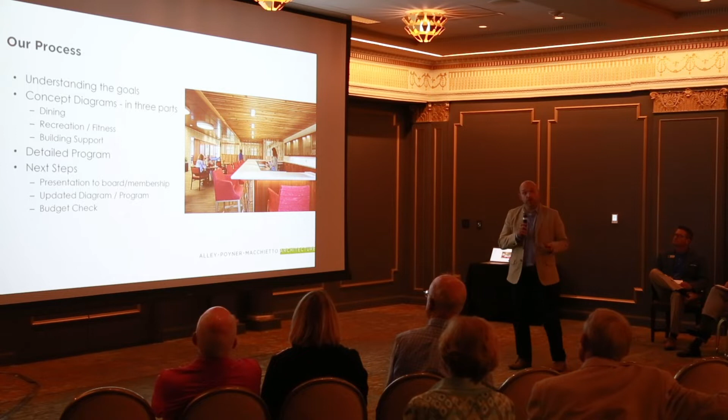So we picked up at a point where the board was considering how to program the replacement of the building and what items to include within that, and start to lay out a design, do some pricing, and pull together a bid package for that.

There's really multiple phases. This is going to focus on the new pool house building, or the replacement of the current pool house building. We'll touch on some other amenities around, and we'll also highlight in the schedule when this renovation occurred, because you'll notice there's fairly serious consideration of the pool house building, then there was kind of a pause in the overall schedule.

And that's because we shifted focus onto the planning for this space, the construction documents. Once construction started on this, then design picked up again concurrently with construction to where we finished.

At a high level, I want to show some of the process. We talked a lot about programming, so early on we went through a list of what spaces are needed, an evaluation of the existing facility, and worked through with the board and staff at the time on what sort of amenities to include. That's the programming, as well as perhaps some conversations about what presentations will be made and what timing.

These are two sketches that were starting points. The one on the left was from a previous consultant who helped the club do some master planning before we were hired, to talk through what could occur in this replacement building for the pool house.

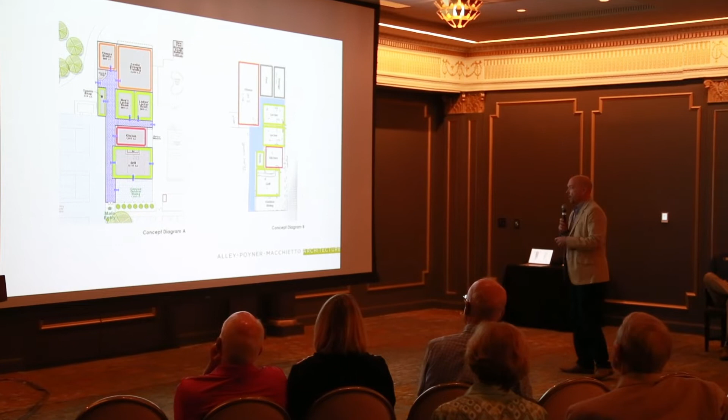The sketch on the right is a variation. We call it concept diagram B for this, but it was a modification of that to look at the early programmatic elements.

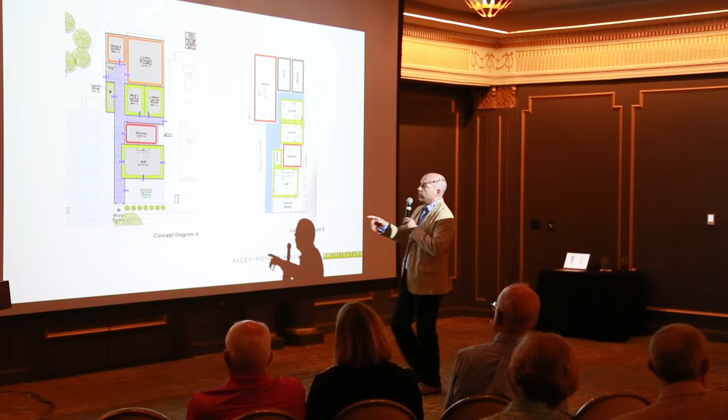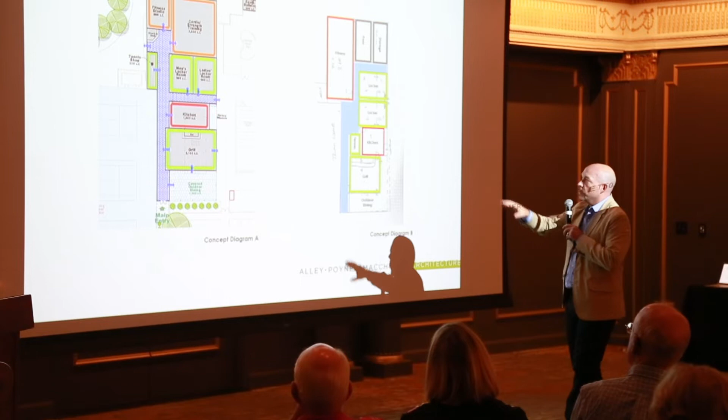The reason I show this is, if you notice, the outside consultant had suggested the replacement building include a kitchen, a grill, which is indoor seating, men's and women's locker rooms, which the current building has, cardio and strength training, which does not currently, as you know, is not included in that building, fitness studio, which that language means a multi-purpose room, could be spinning one day, could be yoga another, a tennis shop moved over as well, and then some outdoor dining, and that was the starting point when we were engaged.

To the right's the first version of that. We started almost immediately at that time working with the board through how does this actually fit on this site. If you've all been through a planning process, you know the early diagrams don't always accommodate all of the things that are not yet known.

In this case, we began almost immediately looking at the size of the kitchen. Kitchens can be sized by a number of factors. We do a lot of hospitality work, including restaurants, so we size them based on the equipment, which is based on the number of either pool visitors you want to serve food to, the number of dishes you want to move through it at what time, and then obviously what the chef wants to prepare.

So we started doing some benchmarking. We also early on did some visualization with the board - what do you want the outdoor dining to look like? Obviously, when you start any process like this, everyone thinks about what you have, unless it's a new build with no precedent. So you have to go through this process of, this is what you have, it's a remnant, what do you want it to be in the future?

We use a lot of examples of case studies where we go through other projects we've designed, to say this is the size of the dining area it serves, this is what we worked through with that restaurant owner or chef on the menu, and this is the equivalent size of the kitchen. This is just one in Dundee that we use as a precedent.

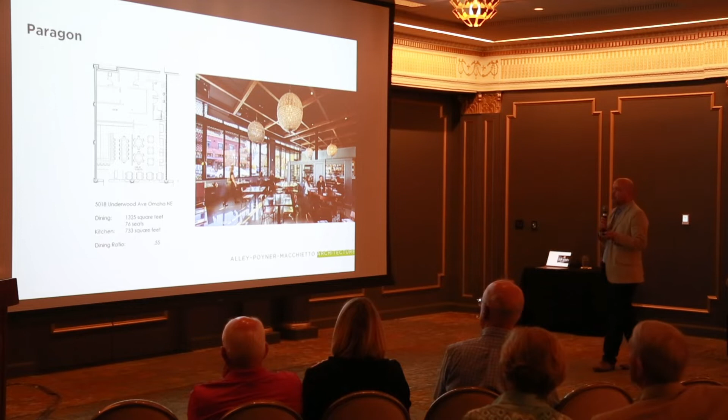We went through some examples of what current workout facilities provide, some we designed, some we didn't, and the amenities within that. We talked about programmatically what the training simulator could look like.

How many bodies do you want to have in the studio space? What's the extent of the possible uses? Personalized training, do you want the capacity to do spinning? Spinning involves bike storage. What's that mean?

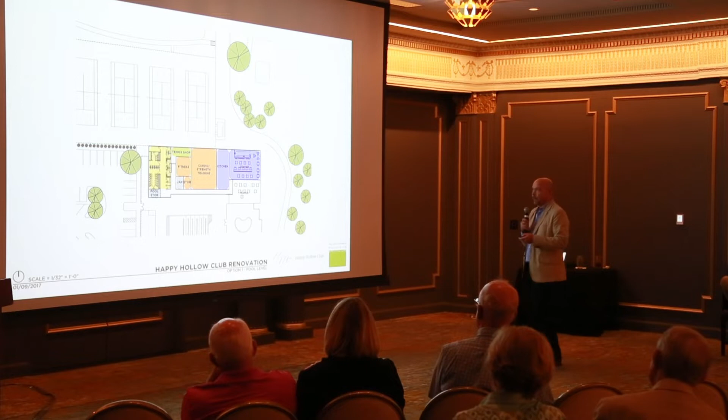Basic early questions, and that comes up with an early program, and we started with that on this project as well. Once we did those early meetings, we started to dig into how it's laid out on the site. This is the first time tonight I'm showing a site plan. You'll see in this case the tennis courts are existing in this drawing, and the pool is existing below.

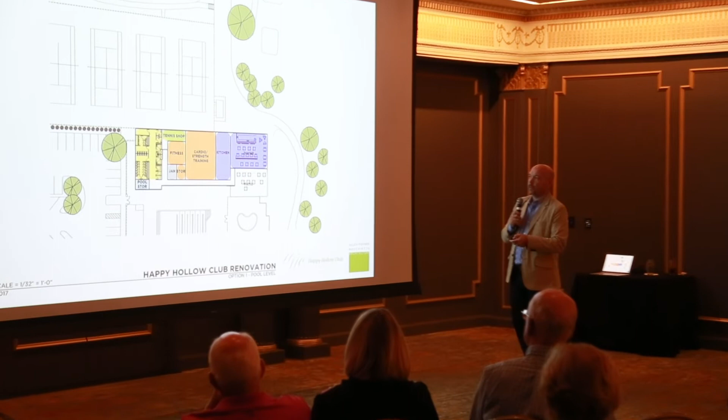Our early goal was to stay within that space that the current pool house sits and the covered picnic area just to the east covers. The story of this site is you're going to quickly see there are constraints to everything fitting on this site, and we've kind of been battling those constraints throughout.

So later versions you'll see the first modification. One of the early changes when we did analysis on the kitchens was the kitchen got bigger, considerably bigger, based on the early diagrams, based on the number of meals served and what we wanted to do within that.

You'll also start to see right sizing of the restrooms. Early on there was one set of restrooms, and if you've been through the restrooms over there now, you know they need to be durable because it's a lot of wet feet, a lot of wet towels. So you start to think about, in any aquatics environment, how durable those need to be.

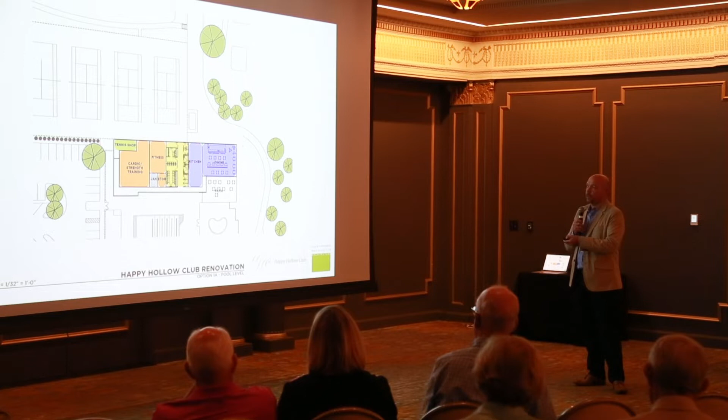At the time we were servicing tennis out of this, and there's no specialized restrooms for tennis, so tennis players would be using the same thing as the wet users of the pool, and also those dining would use the same restrooms. That quickly became a concept of, is that what we want, or do we want to segregate those? In later versions, they eventually floated apart.

We looked at some denser options, different ways to configure it with an upper level. When you start introducing a second level, you start to get two stairs, you start to get an elevator, and that obviously adds some cost and complexity.

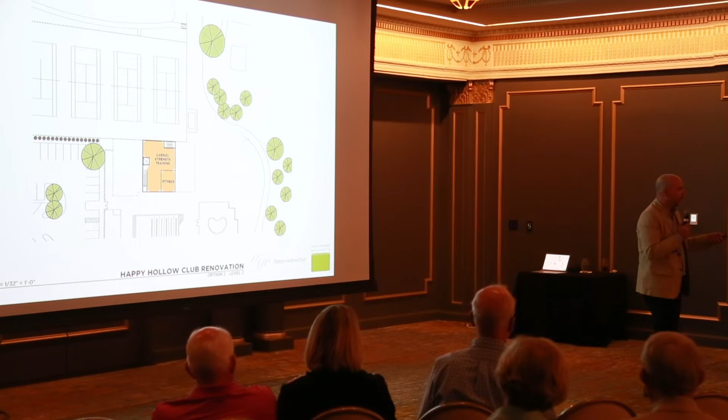So we looked at what could we do to expand the site. We were early on experimenting with diagrams of what this could be. We started to play around with - in this version you'll see the upper is not, it's actually a lower level, we're just showing it in this version of the board of where it could be on the site. We started to experiment with a single entry.

We start to segregate, for the first time, bathrooms for tennis and fitness that are different than the aquatic ones. The aquatic ones are only used when the pool is open, but the fitness center was going to be used year-round. So we started to see the split - bathrooms carved out just for dining, and you start to see the outdoor patio.

One thing that stayed true throughout this is early on we thought, based on our experience on the site, the preferred location for outdoor dining was on the east side. The views of the course are better, you get away from the parking lot, you have views down over the course, and it would be a nice evening as the sun hides behind the building. That remained consistent.

But the building starts to really grow to accommodate all the program things we identified early on. We start to put it on the site, and we're starting to play with the geometry of the building and the idea of a snack bar, how we service the pool. So again, these are just iterations.

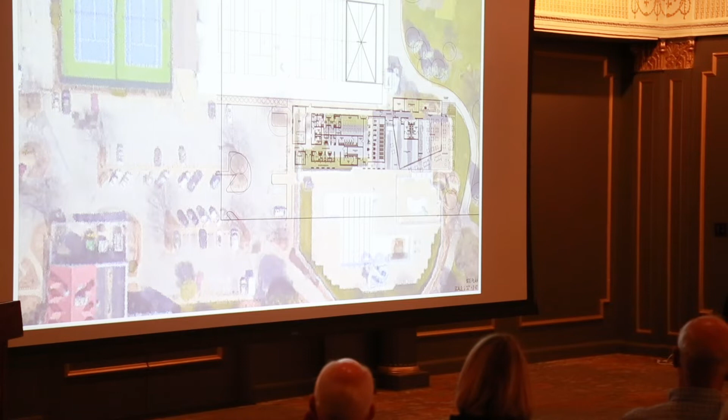You're going to see multiple iterations of the concept, multiple iterations of the building, but each one there's subtle tweaks. At any point, any aspect of this I can dig back into, but I'm kind of skipping through meetings and months.

You'll notice a few programmatic elements—we're just holding a placeholder on a lot of these. The existing pool building that's out there now also houses a small shop area with tools to cut wood, a cart storage area, and all the deck furniture gets stored there during the winter, so there's a large storage area. It's also where equipment for a number of Happy Hollow kids events gets stored, plus there's laundry.

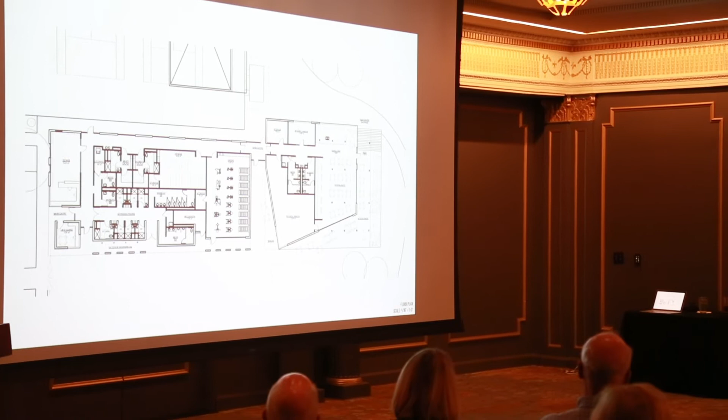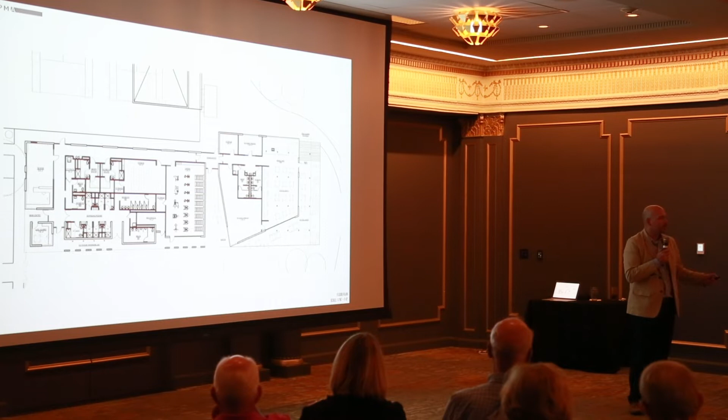So some of those programmatic elements, along with the key one we identified early on—if you're going to serve this number of outdoor dining areas, the pool, and peak events, we need more storage for the restaurant compared to contemporary standards—we wanted to prevent some of the shifting of materials from the main building over to the pool building. So you'll start to see a much larger group of storage spaces within this.

Again, we go back to case studies. Since it's a new concept, we were showing examples of how each of these compare to other restaurants, just to get an idea that we're not overbuilding any part of the kitchen, or whether the restaurant space needs more storage space. So again, benchmarking—you'll see each one we went through: this is 74 seats, 108 seats, 76 seats, just to give us some guidance along the way.

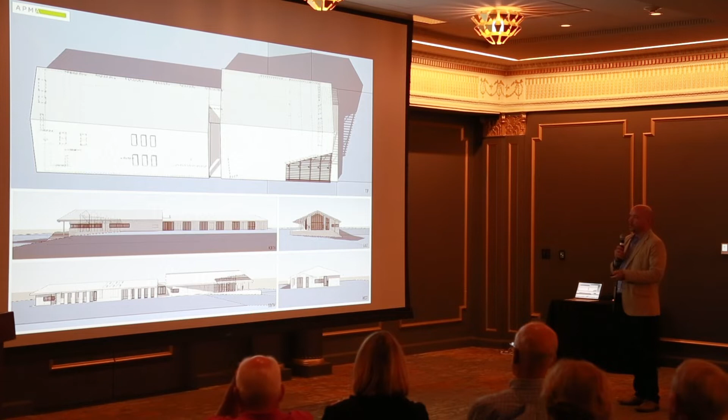And then we started to block out the building. These are some early versions—the final versions end up looking nothing like this, but you'll see for the first time as designers we're starting to make massing out of the diagrams to get a sense of what the building could look like. I think the part that remains is we still like dining on the east, facing that side, and that part's remained true.

And this is where we sort of moved to, with this building growing in size, now 14,000. What would happen if we kept golf and tennis in this footprint? You lose the advantage of having tennis in proximity to the restrooms, and you lose some other things we really liked in some of the schemes, but we thought it was worth exploring.

And we also started to get help from staff to understand what it's like to shovel snow off this tennis dome up against the building—some of the key operational things we were learning about too.

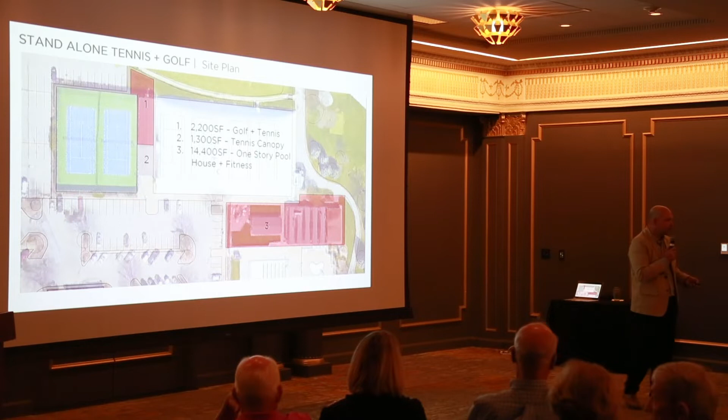One key thing we identified early on is if you're going to make this sort of investment in this zone for fitness and tennis, which are year-round activities, especially if the dining occurs year-round—when the pool is empty and perhaps has ice, snow, and leaves in it, and when the dome is up, what's the experience between those two? How do you make a facility that looks onto a dome covered in ice or an empty pool meet the standards of the club, when most of the venues on this campus have really great views and take advantage of the site? That also became a concern for the designers and the team.

This variation was a true 2-story, and what could we get out of this for 2 stories if we held it back—we can get up to 25,000. Again, variations on layouts. We shifted then to thinking about if we go with the longer items, where does the program land now? These are just diagrams that walked us through that.

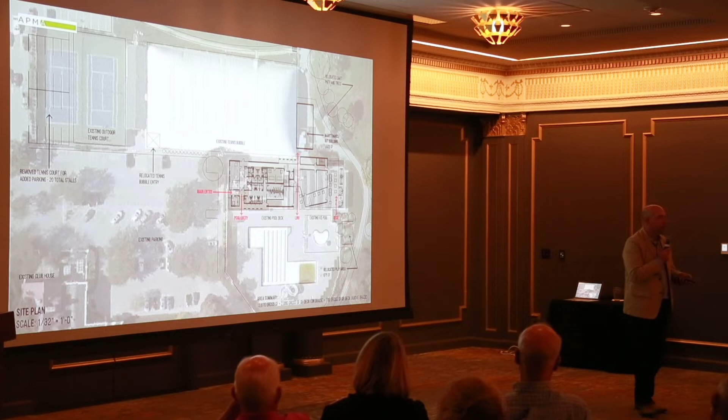We ended up with a 2-story concept that brought back stairs and elevator. Each time we're identifying key things that were priorities for the group we were working with at the time. There's always been a focus on one central entry for this building, and the most recent versions, which you saw in June, showed where you would be welcomed at this building by a single staff member who would welcome you and send you towards the kids' areas, or welcome you and send you to the restaurant, or welcome you and check you into the swimming area.

Security was a high priority to make sure that everything was accounted for, lots of eyes, so that they could serve every guest member to the standards of the club.

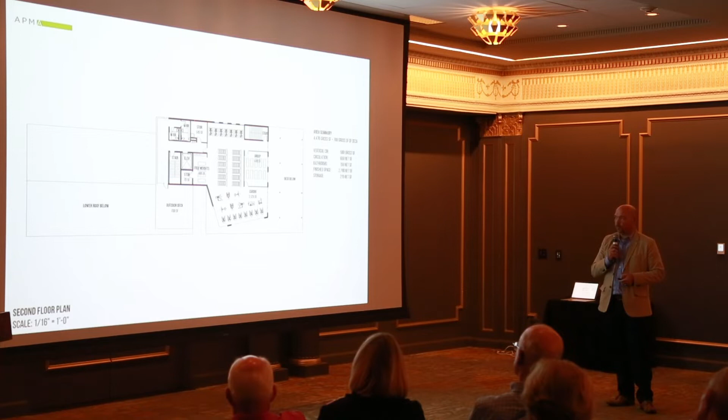In this version, we had a lot of the fitness moved to the 2nd story. This was a critical concept, because when you move fitness to the upper level, with 1 elevator and 2 stairs, that small footprint is not a very efficient use of any of that extra cost.

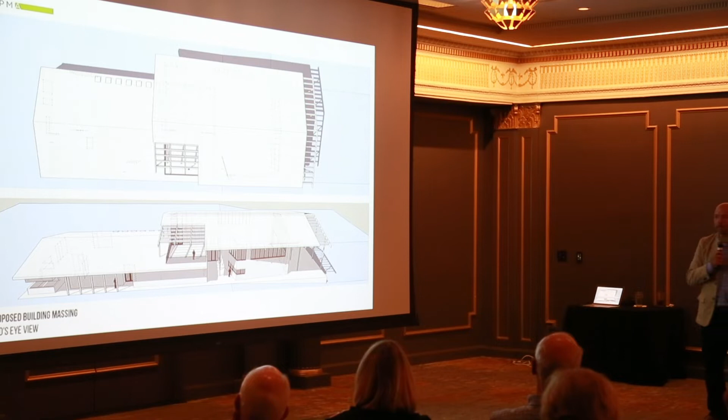Going back a slide, the walk now from the front, back, past the locker room, all the way to the elevator and up, began to show there's some concerns with this site for fitness. We started to mass up what a 2-story building would look like, and you can begin to imagine the cost and complexity of making 2 stories work on such a complicated site.

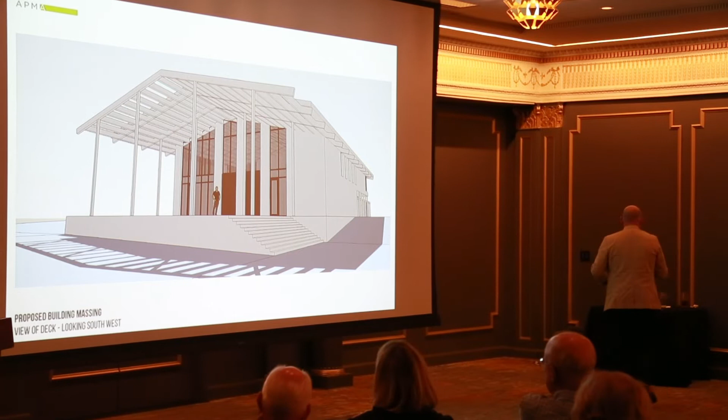I'm going to shift, because of the size of these files, I broke it up into a couple of bunches.

About this time, I'm going to describe one of the concepts that the board asked us to look at, which was a number of the programmatic elements that grew when the 2-story option being added was dining.

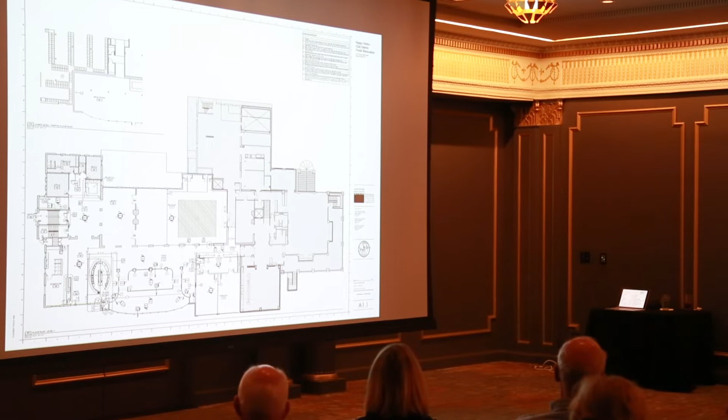There are other ways to accommodate dining besides putting it in a new building. It's not just additional room for dining, but a different experience, driven by the idea that casual dining was difficult for families with children in this building. So we looked at an option to...

Modify the Starlight. The Starlight, as you know, is shadowed out here on this drawing. It was recently completed, in the last few years, as a project. I have a single slide I want to show of that.

One of the options we explored with the board was what could we do to modify the Starlight, to pull the dining program back out of the pool house and bring that building back in size. This is a concept that was shared.

There were a couple of versions of this. It included a light touch - we were really focused on not redoing good work that was done in the Starlight, but just adding to it.

No one likes to renovate something and have the next group or board come in and remove things that were just repaired or replaced.

So we were adding casual seating in the center and booths. We added banquettes and niches. We looked at what we could do with high top tables, where televisions could be added to the Starlight - really changing the feel so that a policy change could occur where it could be casual certain nights and still have areas that felt more formal in other settings. That was explored.

There was some preliminary costing discussed at that time, and this gets us up to about when the full interior of this space you're in now was just working its way through design.

The focus shifted then to this. So there's sort of - is that adding to the footprint, or is that the same footprint of the building? Or not, of the main building?

Of the Starlight? Yeah, there was no addition to the Starlight. It was really just thinking about ways to reconfigure the seating within it, add some diversity of space within that.

So that means we didn't get it right the first time? I think you met the requirements the first time. It just didn't allow for casual dining to be added the way that we were challenged with providing it.

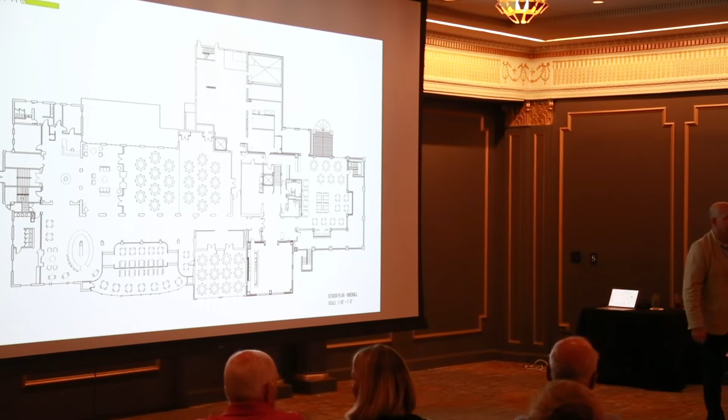I guess that's the way it's phrased to us. There was $750,000 spent in there, and I'm not upset about anything, but it wasn't used, and 90% of the time it's empty, so this may be a good idea. I didn't mean to interrupt.

We were also early challenged with one of the options the previous board had us looking at, which was an addition to the outdoor dining off the Starlight, which could again replace what was being proposed, or has now shifted in concept at least over to the new building.

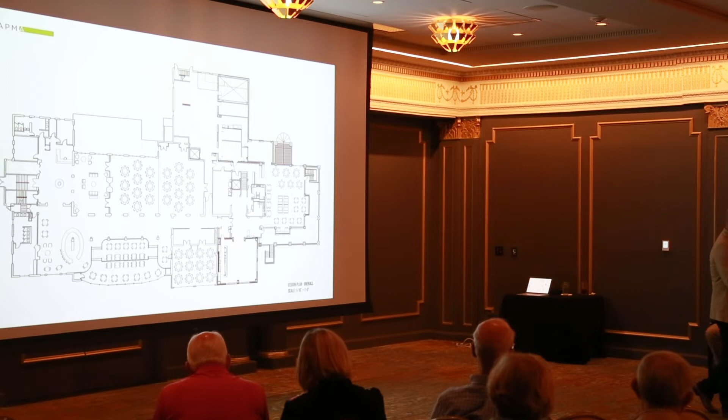We wouldn't do modifications to the kitchen over here, and if we kept the kitchen over there simpler, it'd be a way - you pay more to add the deck on, but you save some money on the kitchen over there.

Those were all sort of discussions the board had, and I think if you have specific questions on that - each year we get a few board members on and a few off, so the knowledge of some of those early discussions is still with some of the board, but there are some board members who were part of that who aren't on the board now.

Okay. Are we still moving to the thought process, or where are we?

Yes, so this picks up right now, and the time frame, this is under construction, it has just started. So we took a pause with that discussion about what to do with the Starlight, what to do with the pool house building while we finished up this. And this, as you all know, was 3 months of construction, but another 6 months in advance of that of planning, budgeting. So the drawing I'm going to show you, this is an actual construction document for this phase of work, which really butted right up against the previous money spent.

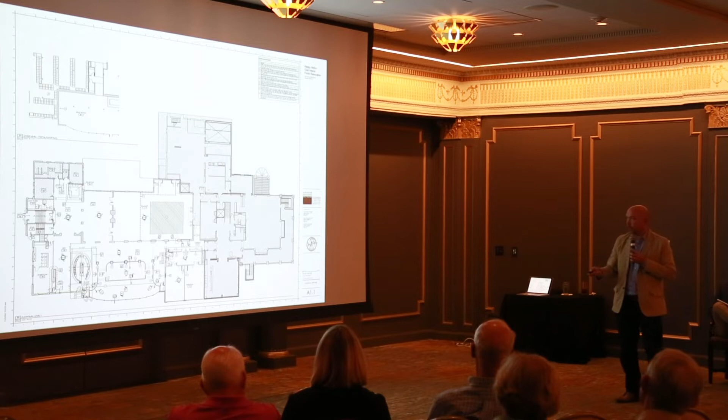There was really no work done in the pub or the Starlight as a part of this renovation. There's again, no need to do that. And that's where we restarted. And this now restarts us, this is December of 17. So construction in this space didn't start until the day after New Year's. We were in for permit in November. So we go in for permit, we're working through the final modification with the subcontractors.

We restarted design planning then for the pool house building. And that's where the conversation started back up about dining over there versus over here for casual. The first meeting we had, we talked about, okay, we're still now, we've taken 6 months off, but we're still in the same position of how much program do you want to fit into this site versus putting back here or some other options. So we restarted the process of saying, what's the final programming we want over here?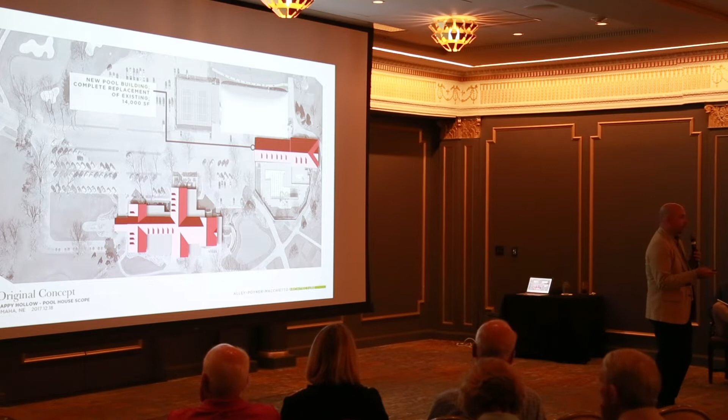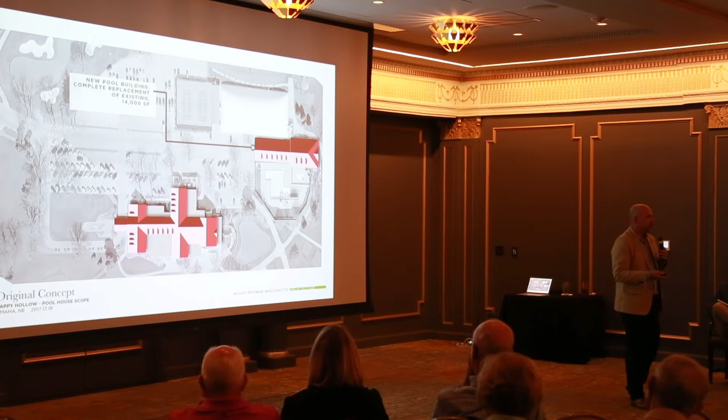This is your existing, this is one of the concepts we showed, and again, we drew it so it matched, because early on, there's really no architecture assigned to these, and we were all getting caught up with what the new pool building wants to look like. It could look exactly like this building. It just would be one cost versus something different, which might be a difference. So we drew these diagrams specifically to show it could be a campus setting.

The second option we looked at was what if we went back to a simplified new snack shack in an existing renovated pool building, and then moved out all of the 12-month-a-year functions into a new building. And the 12-month-a-year functions, if you think about that, that's tennis, happens outdoor, then it moves into the dome. That's fitness, which happens all year long. Locker rooms that relate to that, kids' activities which relate to that.

This building then would be temporary, occupied just during the pool, or perhaps a little early when the weather's nice and a little late when the weather's nice and the pool's closed. It solved sort of some issues, but it produced a big question mark here. And as Brad alluded, if you've been through that building, there's a lot of needs over there. Before it was a pool house building, it was a cart storage building. It has a lot of questionable infrastructure. So we said existing pool building could stay, but we knew we were going to probably spend as much money as a new building on fixing it.

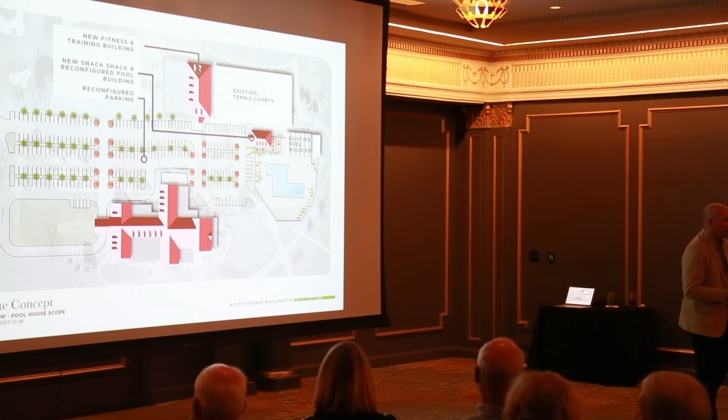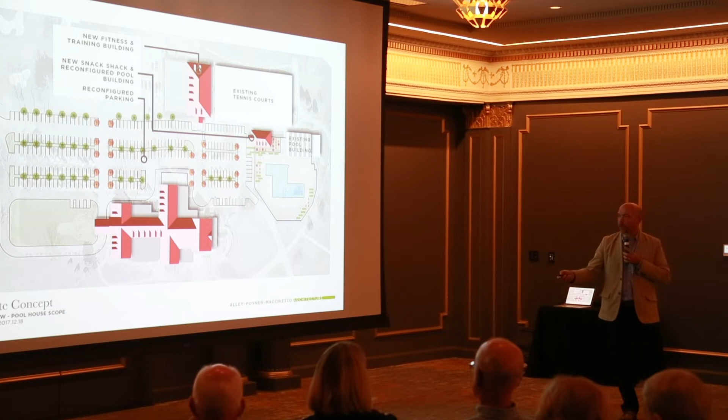This was one of the options we looked at. We also, at this time, we'd heard enough feedback about the parking lot. We took a quick stab at what could we do to redesign the parking lot in a way that got rid of the diagonal parking, allowed people to pull in, park, back out, and leave in the same way to prevent sort of the need to drive all the way through and turn around. So we were looking at those. Drawings like this have impacts around the borders, but it was just a quick concept, future state.

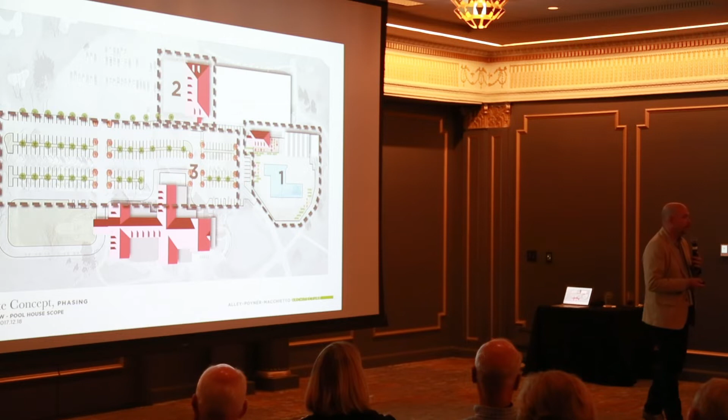This option also was discussed because it would allow us to phase things. So you could have, this is sort of phase one. Phase two would be if you want to move fitness out of the building over in tennis. This also got some pushback because obviously we're building over a tennis court. And we know that's disruptive. We know that would change things.

When we did that, as we typically do, we ask what does this want to be? It's not designed yet. We came up with some ideas of precedents of how casual it could be. We went through some advantages of the program and design, and that was a discussion.

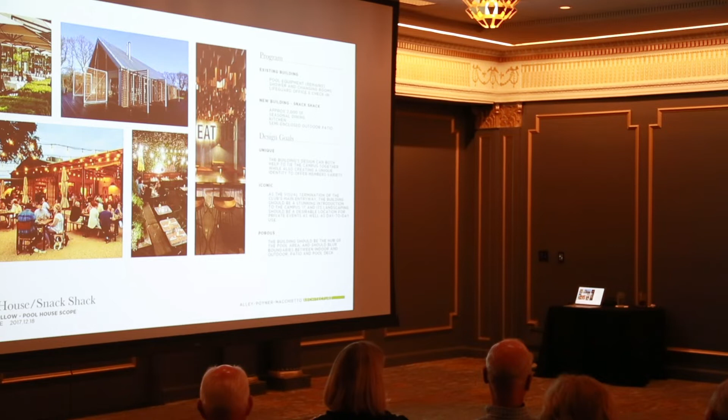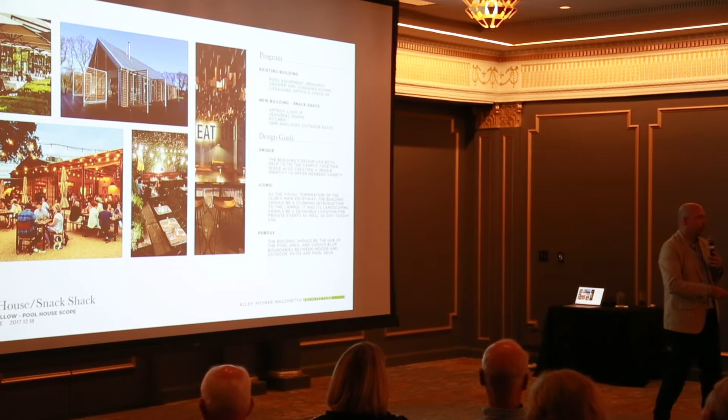Based on this meeting in December of '17, some good feedback came from the board. They said it'd be great if we could keep it all in one building, and there's a lot of advantages to that. You can think about one set of foundations, one set of skins, one construction period for less disruption to the members. We were transitioning through GM at the time, but we knew the previous GM's priority, and we know the current GM's priority: don't make any major change that impacts costs for staffing and operations without thinking it through. So we were thinking that through here as well. One building saves some of those efforts.

The board gave us some feedback, and we spent a couple of weeks and refined it to come back with what they said: take a look at one longer building, single story. We don't want the elevators, we don't want the stairs. We're willing to take a look at losing some parking here if we could do that. So we did a quick look at that.

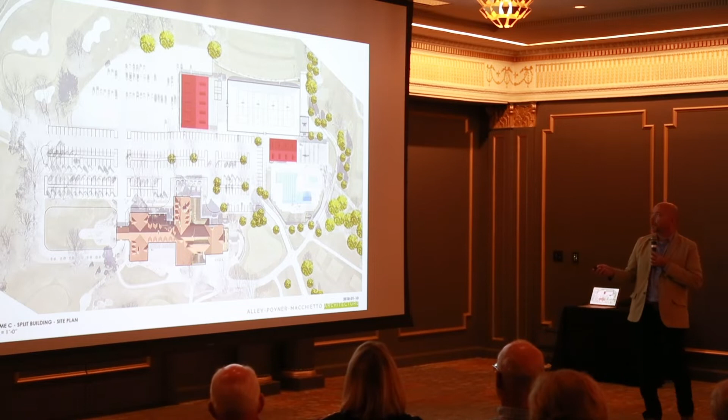We looked at a campus option with the two buildings and what that could be. This is the first dig into the program of the two—before we just talked about it in concept. Here you see cardio, strength, tennis, golf simulators, fitness, and then you end up splitting the restrooms, because I think no matter what you do, you're going to have wet restrooms just for the pool that are of a certain durability and size. You're going to have others for dining, fitness, tennis that are of a different quality. Over here they're all connected to one set of infrastructure; here we were splitting infrastructure, and there's some downside to that aspect.

We also kind of formalized in this discussion with the board that they really liked the idea of one single building. So that's one of the things that came out of those diagrams: let's focus on staffing, convenience for members, and simplicity—one building. This is the version that came out of that. I don't have a date on this, but by my memory this was probably 2.5 or 3 weeks later.

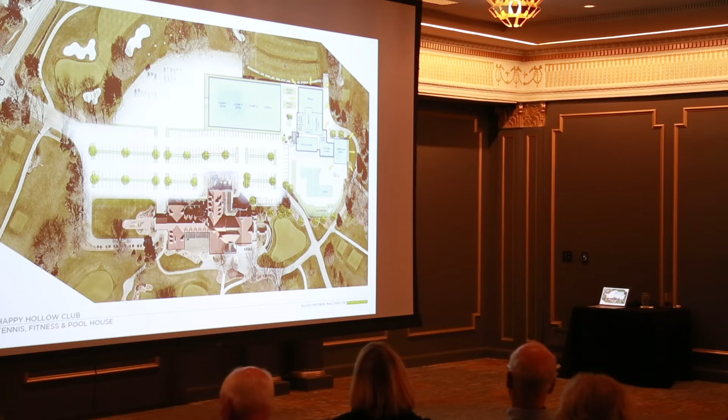Then we do the normal pool house functions facing the pool, and our kitchen, which serves the outdoor deck, serves indoor dining, and the pool, is sort of centralized. Once we figured out—maybe it took us too long to get there—if we could take a tennis court and shift the site concept a little bit, it really allows for a really nice site use.

This did not, or does not, preclude the program changing though. This layout I think works well if dining is in or dining is out, if fitness is considerably smaller or enlarged, or to accommodate expansion. At any time in 20 years, if the club has changed its needs, this building is highly flexible in that regard with that central core concept.

There's a couple of additional slides that relate to this. You see the program firming up. We started to get into layouts. These are large files, so they take a second to flip.

Oops, I skipped over. I'll try and go back. And we jump ahead to February. I'm going to have to, there we go.

In February, we really firmed up the concepts and finalized what the actual programming to be included was. These are amenity slides that some of you have witnessed were shared with the club.

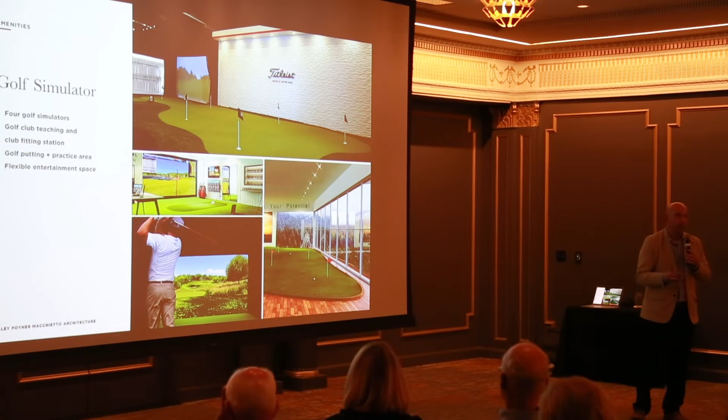Just where is that programming data coming from? Is that just coming from the board? Or how do we track how many people use the fitness center? Good question. Where did that data come from?

Each space within the building was influenced by a mixture of board input, but primarily driven by discussions with the tennis pro, and those who program fitness or teach classes here. We met with a number of individuals on the staff side. In the kitchen, we sat down with the chef.

We tried to have someone on the Happy Hollow side inform us. A few board members stepped up who had particular interest. For example, Cleet stepped in to guide us through some of the fitness selection to present that back to the board. But it was a combination, and Dave's been very good at allowing us access to staff to do that.

We've always had, when we were first selected, the past survey information based on demographics of the club and use. Some of that was in there as well.

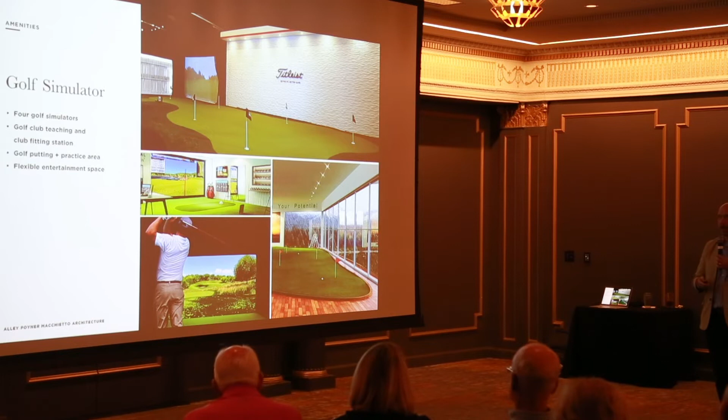As far as the golf simulator goes, this was influenced again by the quantity. It wasn't necessarily influenced by staff, that was more of a board decision. But what to include in the training was definitely influenced by staff. There are 3 bays included that are more standard, and 1 that's larger for teaching, club fitting, and training.

The seating areas around are based on some best practices. A number of members of the board who are here can tell you the clubs they went to and visited to look at peer institutions.

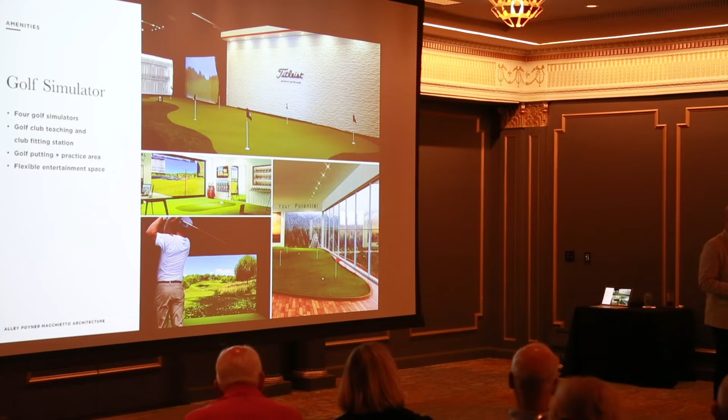For casual dining, we looked at some examples of better options to meet the Happy Hollow standard but allow it to be comfortable for grandkids and children, considering noise and views.

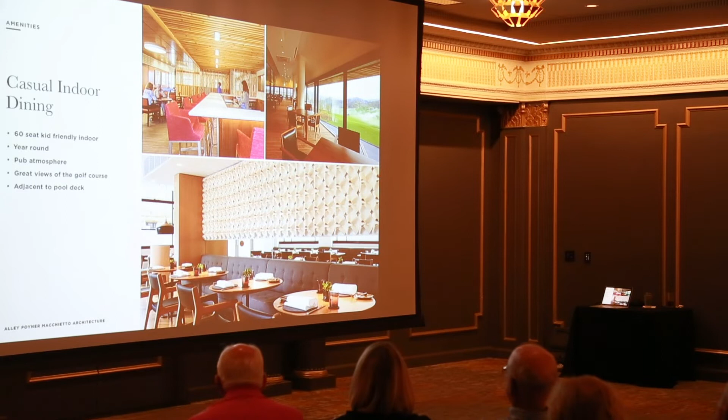One thing of note, there's some reconfiguration of the dome proposed, adding from 4 to 5 indoor courts. We know during the summer in the Omaha area there's lots of places to play tennis, but in the winter that's a great amenity for your pro and your club to have indoors, so we're adding 1. The pickleball option is a current trend, and we're making sure we can accommodate that - we see the popularity of that in other clubs.

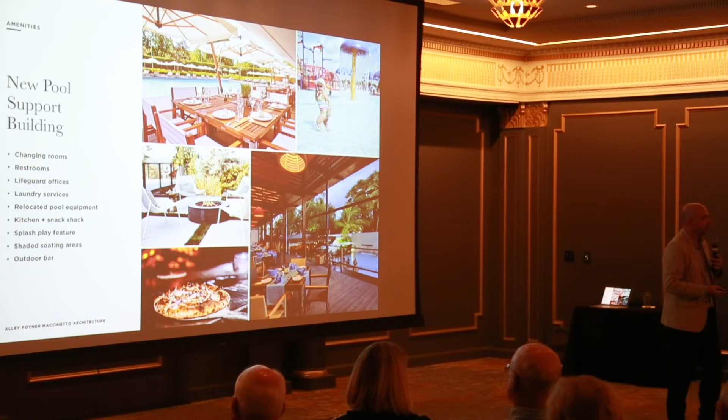Fitness, tennis pro shop - I guess you've seen some of these in the pool support building. There will be all new pool equipment incorporated into this, and we have Larkin Aquatics out of Kansas City who's been guiding us through the process, evaluating your current equipment, looking at life cycle ages, etc. Sort of normal stuff.

We also went through visualization - this is in March. You've seen lots of schematic sketches, and I'd like to say it's a linear process, but it never really is. Internally on our team, we have to get an idea of what the visual should look like, but we also include decision makers from the board.

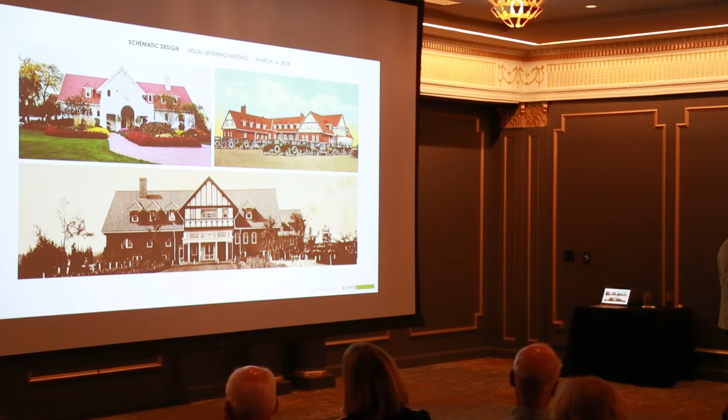So the board went through a process - Alley Poyner Macchietto does a lot of historic preservation, that's one of the things we do. So we love digging into what your building today is, and what it was historically.

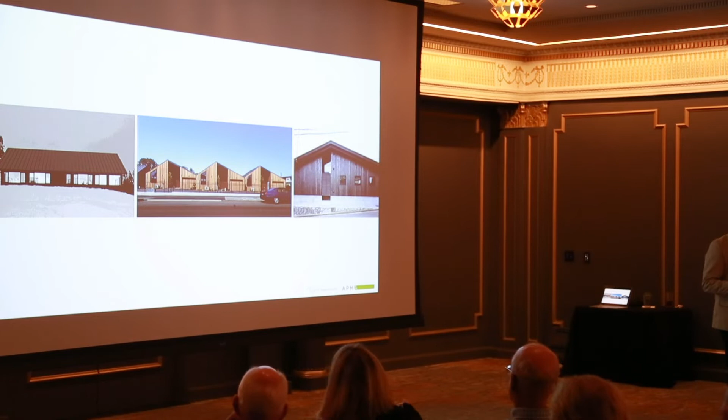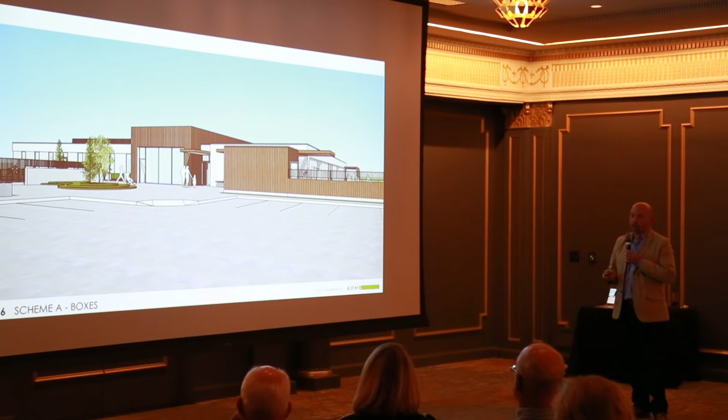We did some visualization with the board where we showed them 3 tracks. I'm going to flip through these pretty quick - roof lines, designs that could influence materials. These are a few slides pulled from a much bigger discussion, but as the pool house building plan was firmed up, this is the first option.

A series - we kind of do these quick tags, so we have 3 options. This is Scheme A, boxes, what it could look like to meet the program with more of a refined look, contemporary.

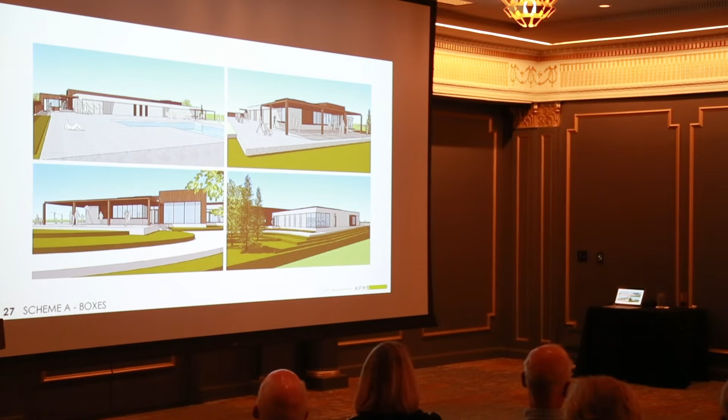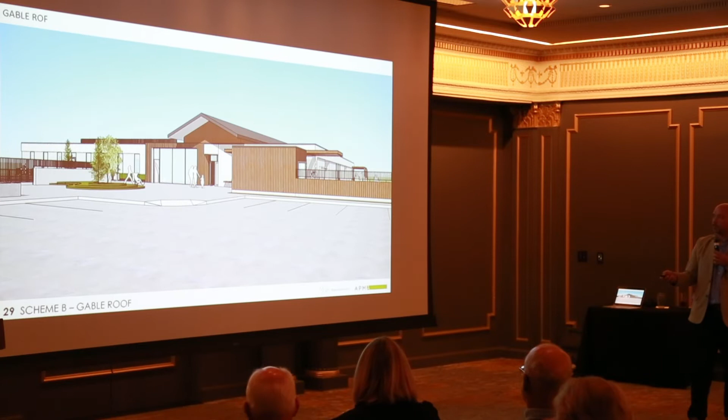There was an early discussion about this pool house building not competing with the historic nature of this building. I think you all know the last slide I'm going to show you, which was after feedback from the club, we shifted back to having it be a contemporary of this building, more of a campus building. But early on, the direction was let's not do that. Let's have it be a new addition to the campus, but not compete with the grandeur of the main clubhouse. Option B was gable roofs.

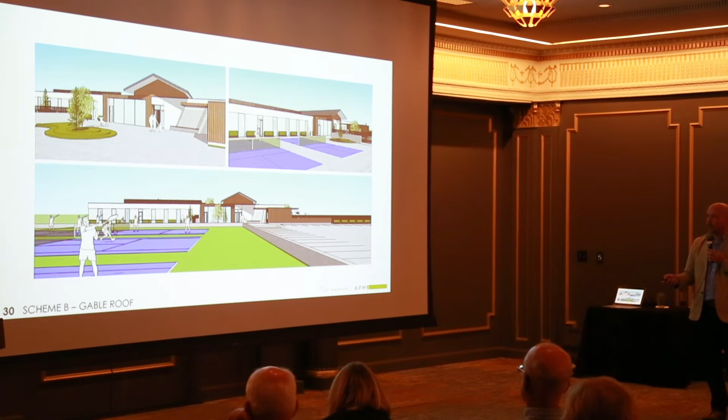So you'll see a low-slung building, but just a little bit of the roof popping up, where glass has taken advantage in all 3 of these options with good views. The final one you'll see is a hip roof. This one eventually became the one that was moved forward by the board.

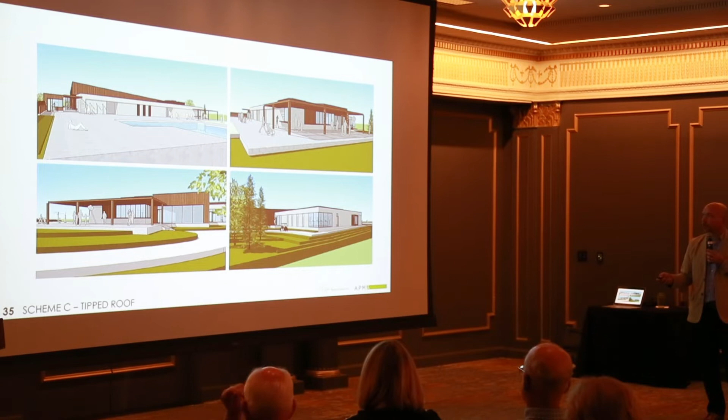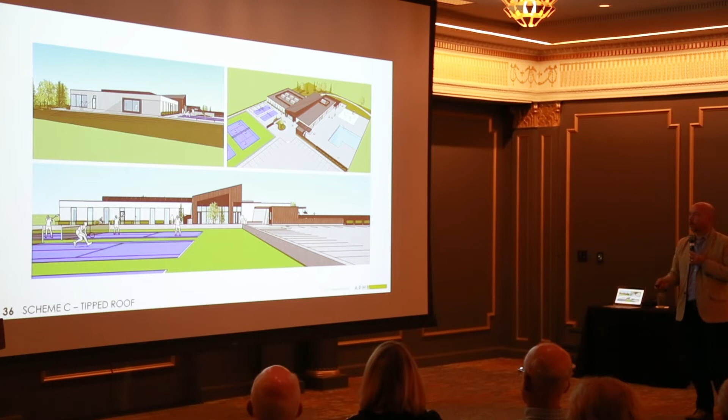In the final development, these early sketches are still things that Audrey and I see that are yet to be refined. The tipped roof had some advantages - it hid some mechanical equipment. There are economic impacts to all these things, but putting mechanical units directly above that center core has some economic advantages, and that hides some of it. So we left that meeting with the tipped roof option, and then you saw some refinement of that. I'll show you the last versions.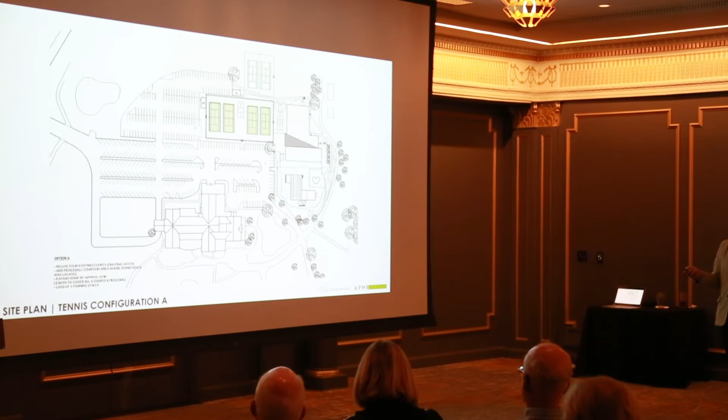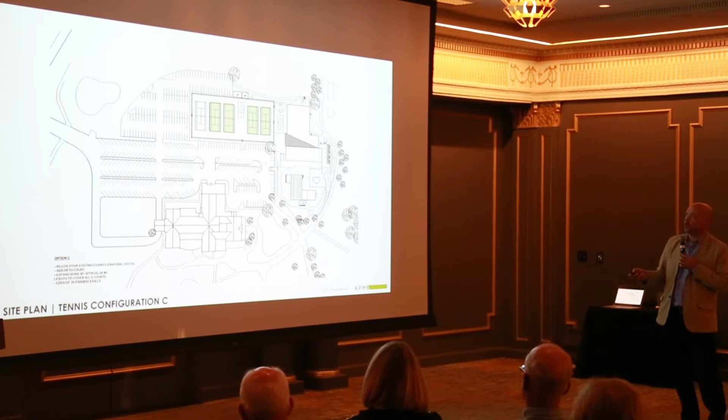We also have done a lot of studies on the tennis configuration. This is what you currently have. The condition of these are different, so we did some analysis. We actually had a consultant come and do an x-ray of the courts to see what was salvageable, what needed to be replaced. We looked at some options to move to the north on the driving range. We looked at options to reconfigure your dome so that we could make that work. We eventually settled on the version that is in the most recent plans, which takes some parking.

And I'm going to shift to the final bit here.

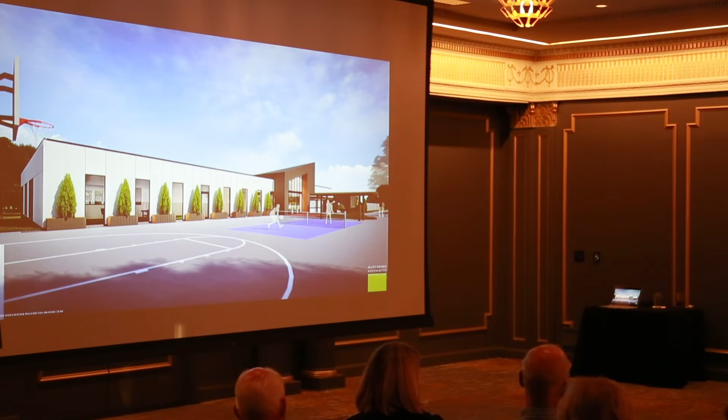How much parking does that take out? We had different versions, but at one time we were down as many as 40 stalls on one version. The last version, I don't remember if it was a net gain or loss, around 20 stalls. But if we could take a look at reconfiguring some other aspects - diagonal parking is not very efficient at all.

So there's some constraints if we can go to perpendicular parking. The trade-off is the drive aisles get slightly larger, which means we're moving every light standard, which means we're affecting curbs. So the overall solution, we think we can accommodate more parking on site, but you should probably hold off, do minimum work until you decide to take that step, because it's going to involve curb, gutter, and light infrastructure work to accommodate it.

We also, as we dipped our toes in - and we're only as good as the information we have - there's certain aspects, as we learned about balls landing in your parking lot. There's some other bigger issues that are a lot more complicated than us just drawing lines, which are easy to draw. As we learned about that, there might be some reconfiguration that could make sense.

We're also keenly aware, and we've been talking with Dave a lot about this, we don't want to build that parking lot up and spend a lot of money just for 4 or 5 peak events. So I know Dave's doing some observations about when your parking lot's full, how many events that are, and if it's worth building the parking lot for Easter Sunday or your big events, versus perhaps even doing some parking remote for staff, which they do some of already.

We saw some examples where they're parking on parts of - you go to the Rose Bowl, they park on the golf course. Perhaps your driving range, there's a part of it that could be parked on for those peak events. So I think there's a good conversation about parking, what we can do for safety overall. I think it's just a bigger conversation.

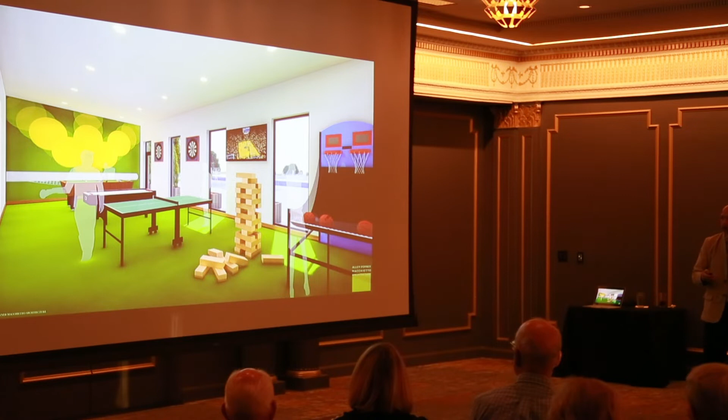It's also proximate to, it's got a door directly out to the pickleball and basketball court, so we could see this as sort of an interior space that supports some of your outdoor youth activity, space for in between tennis lessons for youth, that sort of thing. There's a small nook off of the hallway in the current design that would allow kids to be in this space next to dining when mom and dad or grandpa and grandma are in the main dining room.

The main dining room in this concept, the bar and pool's behind my back, has views out on the golf course, a central fireplace, and I forget, Audrey, how many total TVs we had in this, but it was a priority. It was really meant to be a casual environment where a Creighton basketball game could be watched with a menu that could still meet your standards, but a very different atmosphere acoustically.

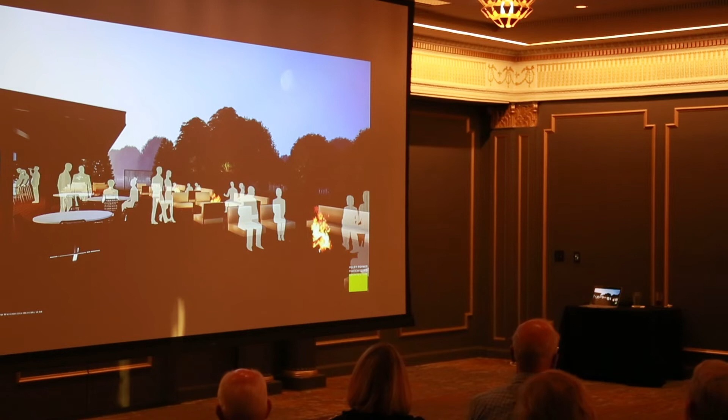This is the east side of the building, which has the outdoor deck with fire pits, with the idea being the pool closes at the end of the pool season, Labor Day, and you have a couple of months for sure where this will still be a night like tonight. This would be an October night. This could be an outdoor dining experience. The kitchen was sized for that. Could be a nice advantage.

And then obviously before the pool opens again in the spring, you wouldn't have to walk by an empty pool to get to it. So it sort of fit well on the site once we made that transition.

Before I skip to the redesign of the exterior, this is sort of where the final plans landed, and at a very high level, one entry point for the full-time building purpose. Got a little side entry past the lifeguard gate again, so everyone is welcomed.

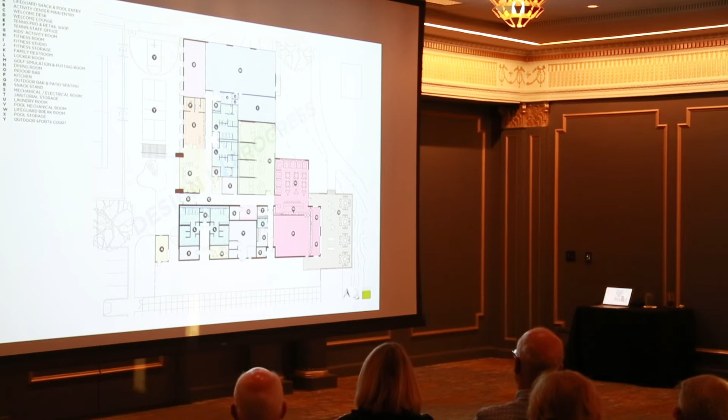This is the basic program right here, a replacement of the building that's there now. Locker rooms, pool equipment, laundry, staff restroom. This is the kitchen. The dining is the part that's expandable or contractible. If the dining goes away as a part of the interior, the kitchen obviously stays, it just loses some equipment. It's downsized: instead of having 14 foot of hood, we end up with 7 or 8 foot of hood.

As you go this direction, you have a center core of functions that will remain kind of regardless of what pieces come and go. You have restrooms, mechanical, staff. And then here's where you have the ring of amenities: golf practice, studio which would be yoga, personalized training, cardio equipment. This is that kids area with the direct access to the pickleball and basketball. And this is the tennis pro shop. And option right here is the lobby, which would be the hub for all these things to happen. That's the concept plan.

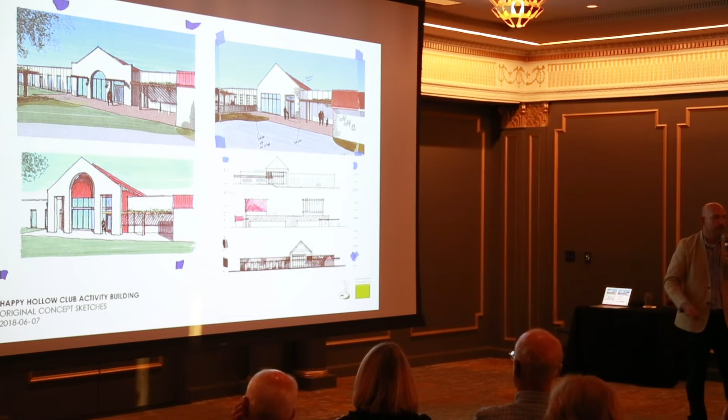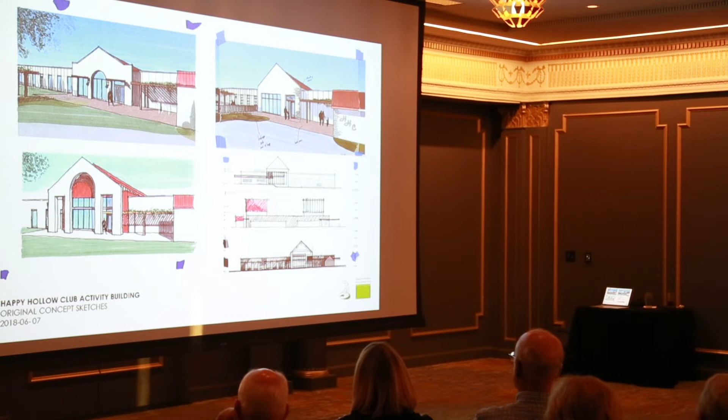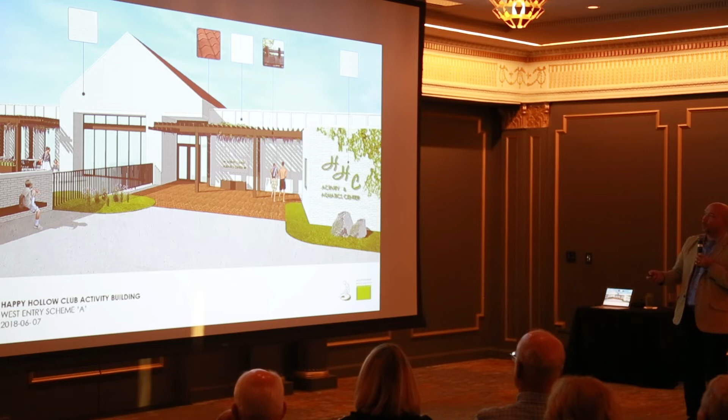And then we obviously got very direct feedback. The board asked us to re-engage. We got some negative feedback on the hip roof, so we dug right back in and went to some options in June of what could we be, and these are just different sketches, which I put in to show the different exploration. I think the solution that came out of that, being a much more compatible building with Happy Hollow's main building, is a good solution.

We were excited about it. It's just different, a change in plans, and we embrace that change.

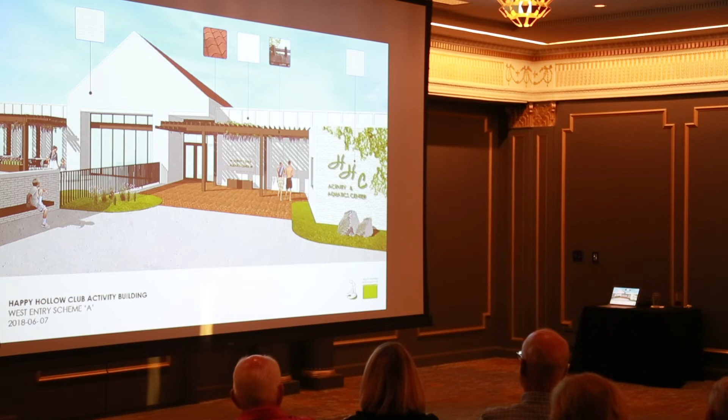Here you'll see an outdoor shade structure, which is nice to break down the scale, and the materials being brick. We're still very conscious of cost, so there are some materials here that are not at the same level as this building, because that's what we were running up against the whole time. This is a brick building with a clay tile roof, but we weren't doing clay tile - we're using some materials that are less expensive but more in line with trends today. You can see what eliminating those tennis courts and sliding the building onto that pad does for the whole building, opening it up into really nice views.

Brad, I think that took longer than the last one, sorry, but some good questions in the process.

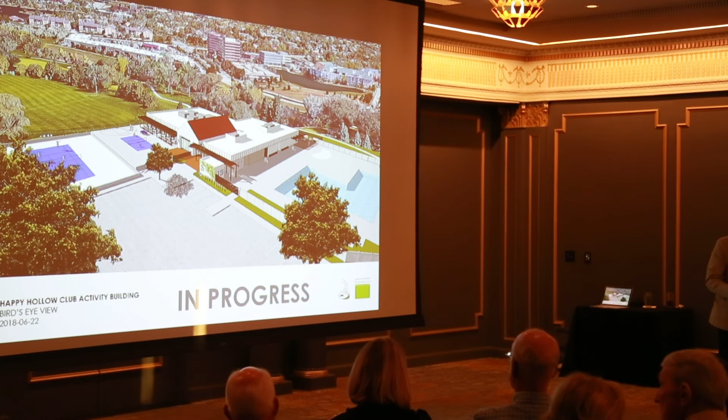Absolutely, thank you, Jay. So you can see there's a lot of process in this, a lot of options, a lot of details of those options that we didn't go over, but there's just a lot of information. At this point we're welcoming feedback, and on questions and answers, some of them will just be good questions that we'll consider. We're taking great notes, and we'll combine this with all the feedback we get - that's what we're here to do next, is listen. I'll ask that if you have a question, let us bring you a mic so everyone can hear, because it's a big room with a lot of space.

How are all these things going to be used, and will they all be used? The only reason I ask is because of the big expense spent here several years ago that hasn't been used, and it wasn't that much nicer than before - I don't mean that as a negative, but I think it's a good question. The only other question I have is that this is basically a traditional building, pretty exquisite - can you hold the mic up to your mouth? Pretty exquisite, but it is old, and a lot of this looks very modern, but obviously that'll all blend together well. So, only two things: how do you determine if all of these things that the money's been spent for will be used?

Okay, yeah, so I'll take the first question first, second question second. So on pricing, right now as a club you purchase no materials for this building, whatever size it is. Until you purchase materials, until you get a full schedule which determines how long the general contractor is on site, and until those are locked in, we don't know the exact price.

In this case, you have the bar of the building, which we've referred to as the pool functions—let me get there, which is this zone right here. That zone houses your chemicals for the pool, the vibration and heat from the heater, and then all of the locker rooms for the wet feet, which really want to be super durable. So it's a fairly conventional approach to that, with a lot of masonry on the inside, durable.

The options you have are what to do with the casual dining if it stays in the program, and what to do with the fitness. We went through a whole gamut of fitness options. As a firm, we've designed a bunch of Aspen athletic clubs, TrueFit athletic clubs on one end. We're doing a $40 million facility for the city of Papillion right now, a fitness club where the field house will open up in a couple of months, and next year will be the interior. Again, we went through all those options of what's appropriate, what kind of flooring do you want, and then overlaid that with what's the expectations at Happy Hollow and how it matches budget-wise. So there's no magic to that—it evolved out of that process.

Okay, thank you. This question is probably for the Friends of Happy Hollow and the board.

But based on the fact that the reconsideration of this project came about because of a vote of the membership and a decision by the board to take a second look at it, since that decision has been made, has there been any areas of common agreement since then between the Friends of Happy Hollow and the board on the project?